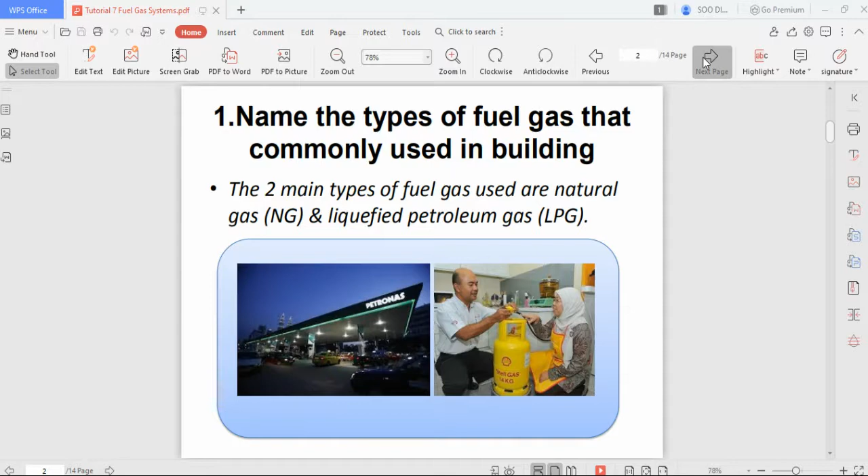Okay, so the second question is asking you to explain the reason why natural gas has been gaining ground over petroleum in recent years. So we have our LPG and our natural gas as of question 1, which we use for cooking. So why is natural gas preferred over petroleum? It's because natural gas burns cleaner and emits lower levels of potentially harmful byproducts into the air.

And then natural gas is combustible, and when burned, gives off a great deal of energy, which is about the same as LPG. And then natural gas is lighter than air and easily dispersed if there's a gas leak. So this is one of the main advantages natural gas has over LPG. So LPG is actually heavier than air.

So in the event of a gas leak, if the LPG is leaking in a room which does not have any ventilation, then if you were to go in and breathe it in, you will actually die due to breathing in the chemical lah. So natural gas has the advantage of being easier to disperse. If there's ventilation and an opening, it can easily be ventilated and dispersed out into the air.

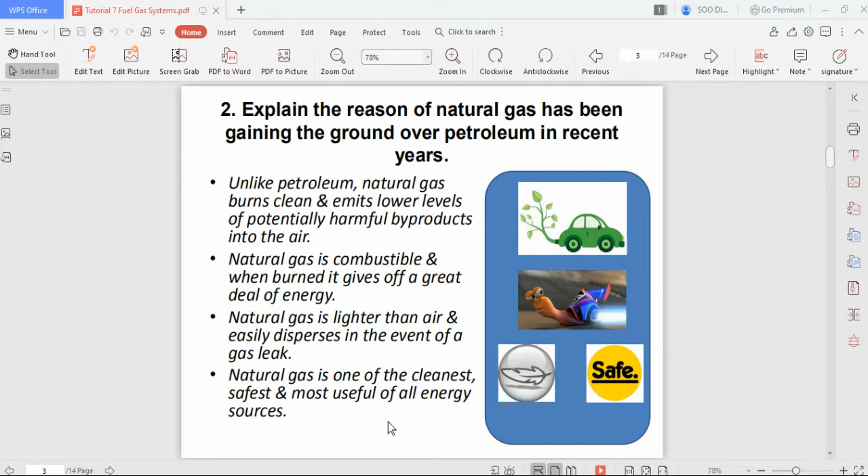Okay, so on to the next question. So in Malaysia, LPG and NG are generally the two types of gas energy supplied to consumers. So with the aid of a diagram, discuss the concept of how LPG and NG are supplied to the consumer. So there are two methods of how the LPG and NG are being supplied. For LPG, they can only be contained in a local area.

For a condominium, we actually store it in a compound, in cylinders in such a form. So when they are stored in a compound in cylinders in such a form, it is actually called a manifold system. So this is a manifold system. And then another method of storing them is called a bulk tank system, which is this picture. So they are stored in a big tank, and it can be either above ground or underground.

So when they are stored in this container, they are connected via pipeline to the supplier lah. So how we get the supply of this LPG is through a pipeline. So one thing to note about LPG, which is liquefied petroleum gas: we use it in the form of gas, but because we do not want to have a very big storage to store the gas, we pressurize the gas into a liquid. So essentially, we are storing the gas in liquid form for more efficient space.

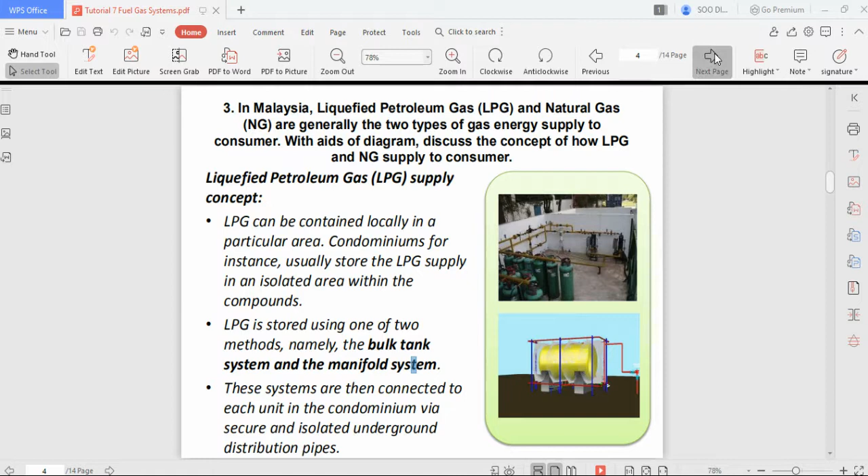Okay, so this is the LPG supply concept, the diagram for it. So we have our storage vessel, then they have to pass by two regulators. What these regulators do is lower down the pressure of the liquefied petroleum gas. They lower down the pressure from the first regulator from either 120 or 80 psi to 10 to 2 psi. So when it goes close to the consumer at a very low pressure, it will pass by a meter, which is there to read how much gas you have consumed.

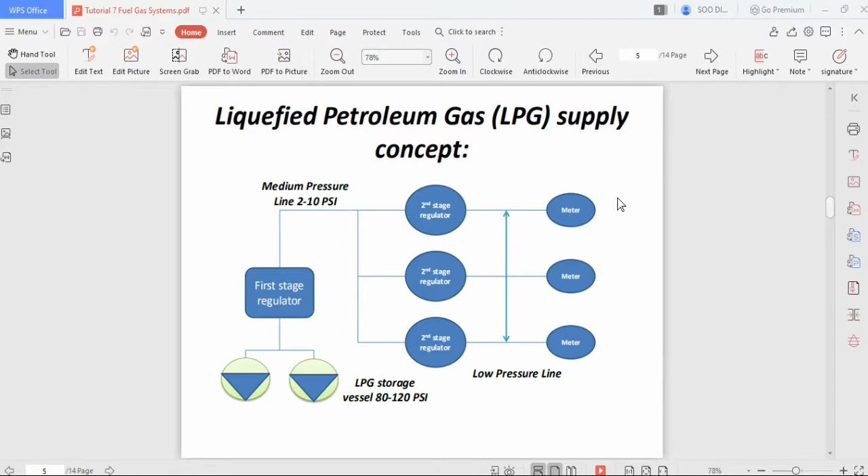Okay, so question 3. In Malaysia, LPG and natural gas are generally the two types of gas supplied to consumers. With the aid of a diagram, discuss the concept of how LPG and NG are supplied to consumers. Okay, so the concept is the natural gas is conveyed through the PGU pipeline. This is owned by Petronas, and it is distributed throughout Peninsular Malaysia after being processed in the gas processing plant. Once it leaves the PGU pipeline, the natural gas will be distributed through the piped gas distribution system to suppliers or businesses and homes.

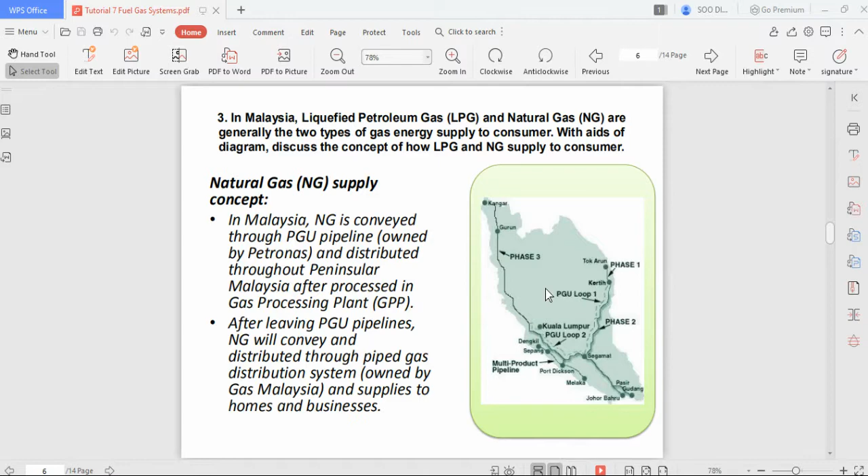So basically, NG is produced by Petronas. They have pipelines installed which transport the natural gas from their processing plant to home and business owners. So this is a figure of the layout of the natural gas pipeline in Malaysia.

Okay, so this is a flowchart of how the natural gas is distributed. We have our processing plant, treatment plant. This one is where the natural gas is mined offshore. In Malaysia, our natural gas and petroleum is all out in the sea near the Sabah Sarawak coast. Once it is drilled and obtained, it will be sent to the treatment plant. Once it is processed there, it will be transported via pipeline to

the city gate station. Do note that from the treatment plant to the city gate it is at a very high pressure, and from the city gate to the regulator it will be at a lower pressure, and as it passes by different stages, the pressure will get lower and lower. Once it gets to the gas meter, the gas pressure will be at its lowest for consumption purposes.

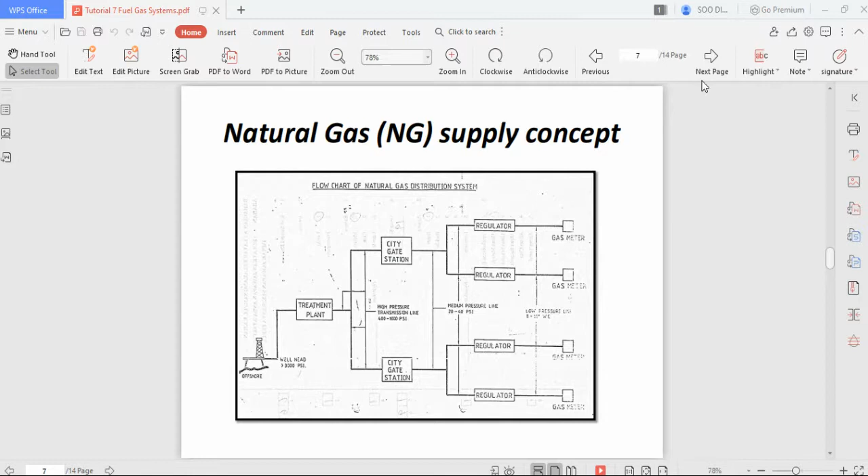Okay, so this is another diagram of the natural gas supply concept. As before, we have our city gate, and then there's an additional stage. This is a more detailed supply concept. There's an odorization station, then a district station, and then either a service station, area station, regulating station, service station. These are all different points in place to reduce the pressure.

Except for the odorization station, which is to put sulfur into the natural gas so that we are able to detect any leakage. At the end, that will be our consumer, for domestic or industrial usage. Then we will have our meter before entering our house.

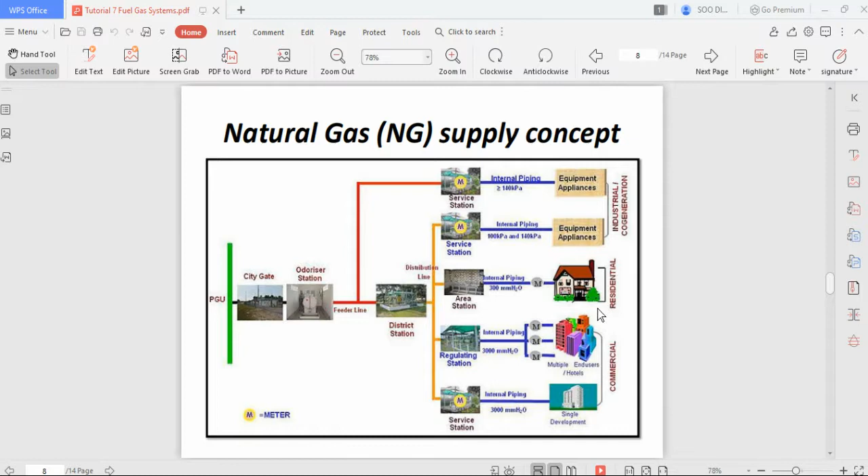Okay, so for question 4, name and explain the two types of fuel gas system installation. As the previous question has already covered, one of the methods of fuel gas system installation is bulk gas storage. Essentially it's like a bullet.

This is for either LPG or natural gas. Both of them can be stored in this container. This container is built to withstand very, very high pressure. When the gas is put into this tank, it will be at high pressure to compress the gas into a liquid. It can be above ground or underground.

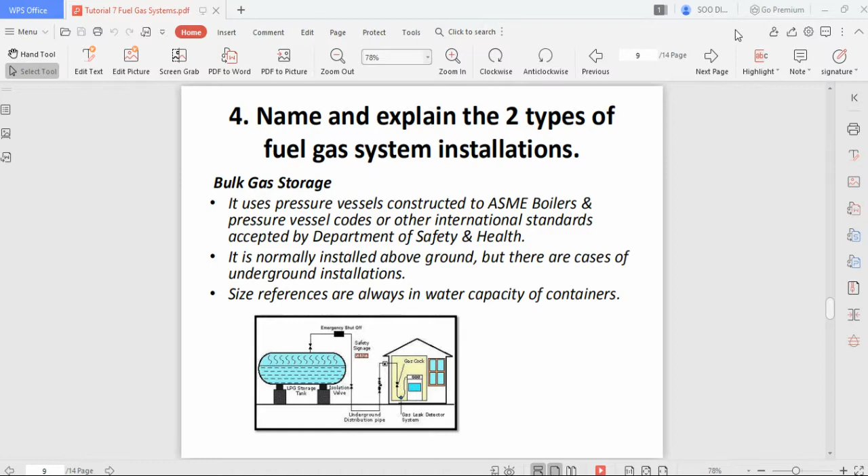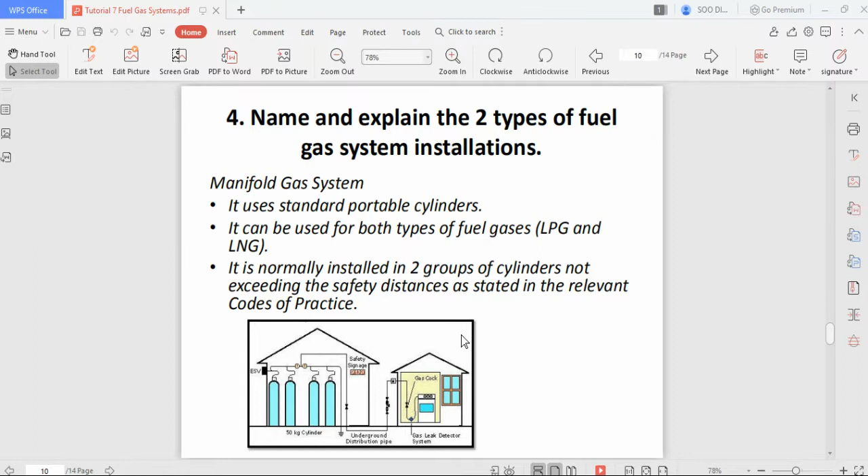So the next is the manifold gas system. So it's in a standard portable cylinder, and then is installed in two groups. So usually a portable cylinder is used in a condo. There will be a compound for it, and then it's usually used in a condo.

Okay, so question 5 is to explain the function of a gas pressure regulator and the operation of three main elements. So the purpose of a gas pressure regulator is to maintain a constant downstream gas pressure by reducing the upstream or inlet pressure to a desired downstream pressure. So within the operating range of the regulator, it will maintain that downstream pressure regardless of changes in the gas flow and changes in the upstream pressure condition.

So it doesn't matter how high or how low the supply gas flow becomes, the gas pressure regulator in place is to ensure that there's a constant low pressure of gas being supplied downstream. So this is the idea of why we need to install a gas pressure regulator for the consumer.

So the necessary gas pressure supplied to the consumer will be very, very low compared to what is being supplied by the supplier. So it doesn't matter if the gas pressure increases or decreases, this gas pressure regulator in place will ensure that the consumer will be obtaining a constant flow of gas.

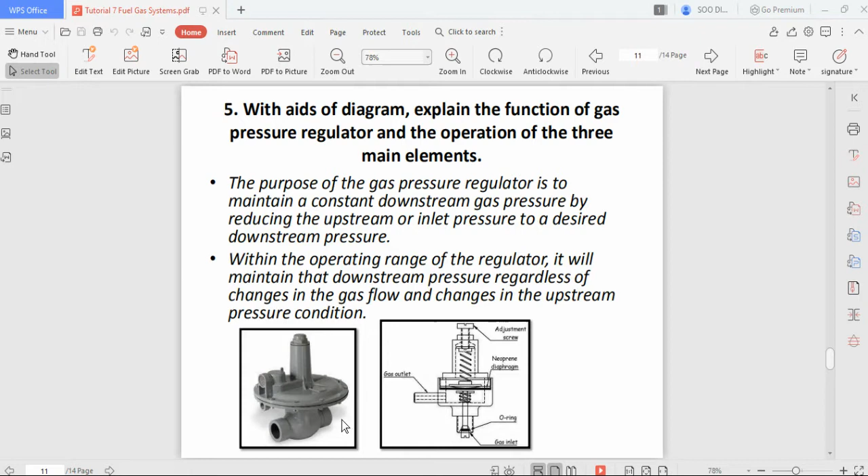Okay, so there are three main elements. These three main elements work hand in hand to ensure that the consumer is getting a constant flow of the gas. So the loading element is a spring, and it will adjust itself according to how much pressure is being forced onto this spring. And then we have our measuring element. So this is a neoprene diaphragm.

So it measures the changes in the downstream condition and responds to position the valve to a position which counteracts the changes and returns the downstream pressure to its original level. And then the last is the restricting element, which is the valve. So it increases or decreases the downstream pressure by either closing down or opening up the valve. So all these elements have to be in place in order to ensure that the consumer is having a constant flow of gas.

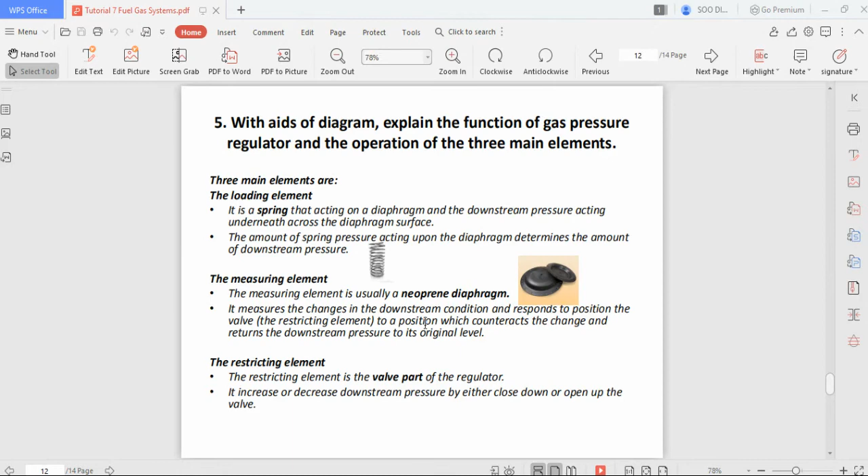So this is the diagram for the gas pressure regulator. So we have our loading element, which is a spring up here. Then we have our measuring element, which is the diaphragm, and then the restricting element, which is the valve. So depending on the supply pressure, these three elements will work hand in hand to ensure that the outlet pressure is constant.

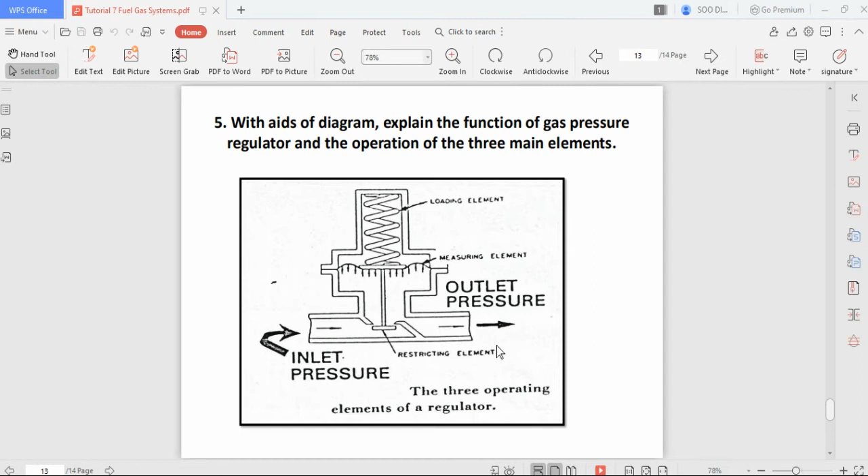So this is the last question. It's to explain the importance of gas odorizing. So the reason why natural gas or all fuel gas have to be odorized is because fuel gases in their natural state are odorless, which means you will not be able to smell them. So before they are supplied to the customer, they must be odorized so that any leaking gas may be detected by odor before gas concentration in the atmosphere reaches a level capable of causing fire or explosion.

And then all fuel gas supplied to consumers must be odorized so that, okay, so this is the same thing. So natural gas has to be odorized not just because of fire or explosion. When it reaches a critical level, if you were to breathe in, you will actually be breathing in the chemical. So instead of taking in oxygen, if you were to take this chemical in, you will faint.

So there's a hazard of that, and then there's also a hazard of fire or explosion. So just a spark causes an explosion, and then people will die. So that's why all gases have to be odorized. So this odorization mostly is putting in sulfur at a very low level, which is considered harmless for humans.